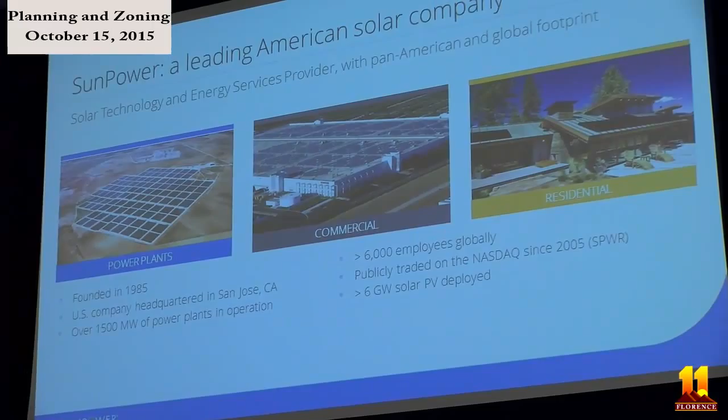I won't stick on this slide very long, but just want to talk about who SunPower is. Again, we're a U.S.-based company, headquartered in San Jose, California. We have over 6,000 employees. We've been around for 30 years.

This gives you an idea of where our project is. The Bonnybrooke Solar Project is right here in black within the circle. I only have 2 arrows here just to show this is SunPower's project. Often confused with the Bonnybrook project is the Sandstone Solar Project, which is sPower. So we just made our names very similar to confuse you, but they're 2 different companies. You can see the Bonnybrook project, our project, is out northeast of town, about 4 miles near the state prison complex. You see the flood zone here. There's actually, just adjacent to the site, some prison farmland that's farmed by inmates, as opposed to the Sandstone project, which is surrounded by a master plan community.

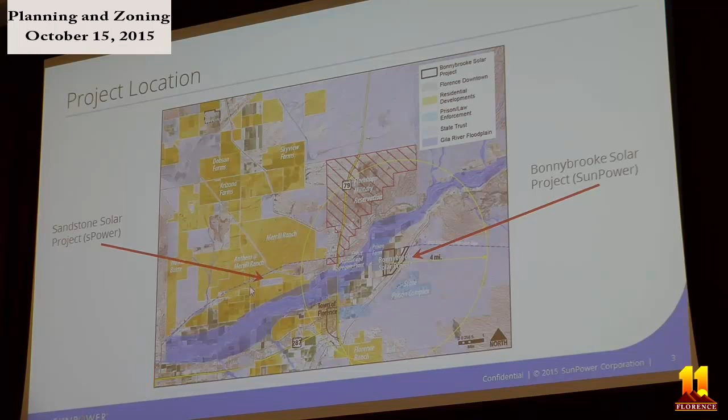One quick slide here on SunPower technology. I won't go through everything here. Just at the last Planning and Zoning Commission hearing, I think one of the commissioners had a question about the height of the system, so I dug into that a little deeper. The horizontal supports, the torque tubes for our single axis tracker system, are about 5 feet tall. So if the panels are completely level, your system's going to be about 5 feet. At full tilt, when they're at their 45-degree angle, the max height's going to be about 8 feet, never higher than 9.5 feet.

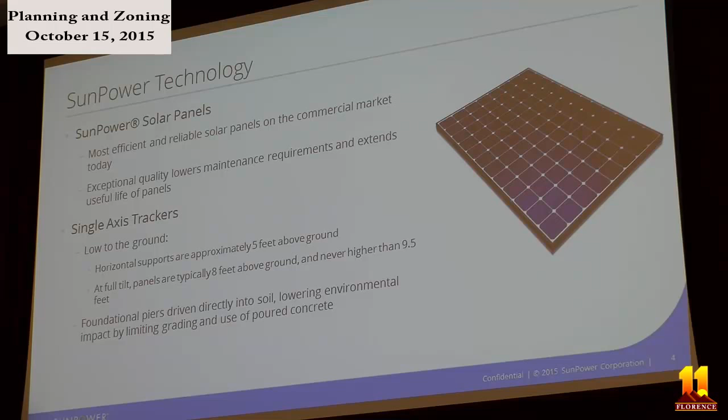And that's really it for me. I just threw up a slide here that's in the design review application of the site plan that we could use for reference, but I'll pass it over to planning.

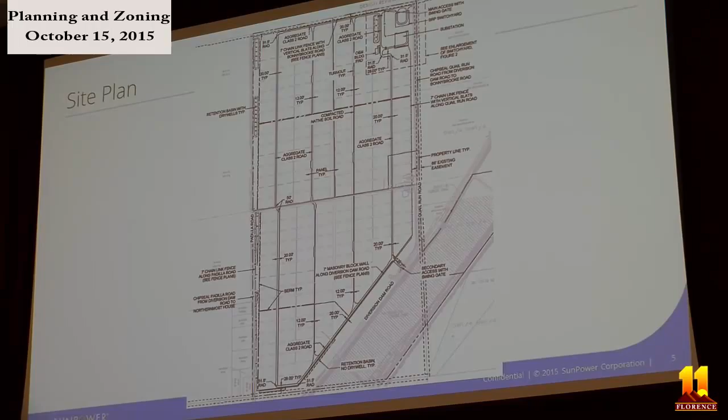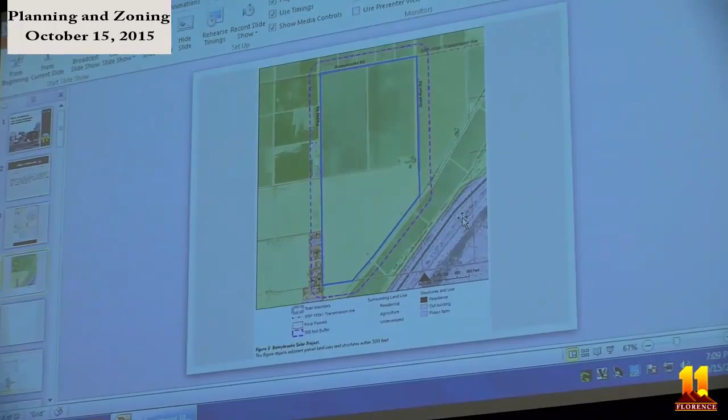Chair, Vice Chair, Commission. Since you've already given a great description of where it's located, and Drew just gave another couple of slides regarding the location, I won't bore you with that, it's all in the staff report. The image in front of you is a close-up of the site, currently agricultural, surrounded to the west by some homes off of Padilla Road. There's the site plan that was just shown. I wanted to cover some of the basic points.

This project will be on 282 acres of agricultural land. As you know, the main road to get to the site is Diversion Dam, which leads up to Quail Run Road. The primary access is going to be off of Quail Run Road.

Let's see if I have a better image. Let's try this, this might work better. There we go. So primary access is going to be off of Quail Run, and to the north is Bonnybrooke Road. This is how you access the site, I believe it's 20 feet wide. It'll have a gate for security. The secondary point of access is going to be off of Diversion Dam, right here, and it'll also have a gate, a Knox box, which will allow emergency services to access the site.

What we have here in front of you is the layout of the very top, the entry point, the switch yard, the SRP switch yard. Over here we have an image that shows the layout to the operations building. The black portion, as you see here, that's the pavement, and the rest is going to be compacted soil.

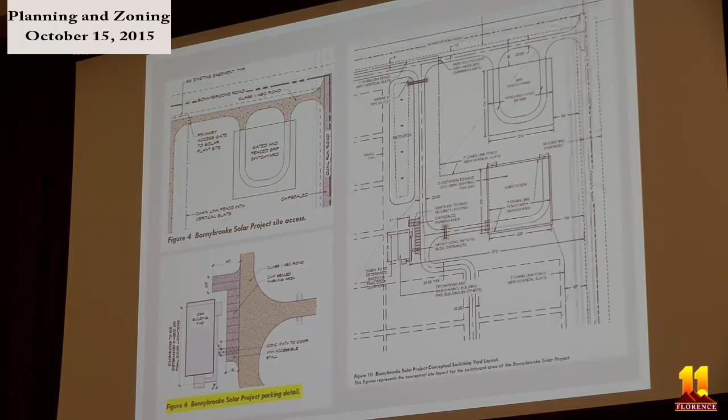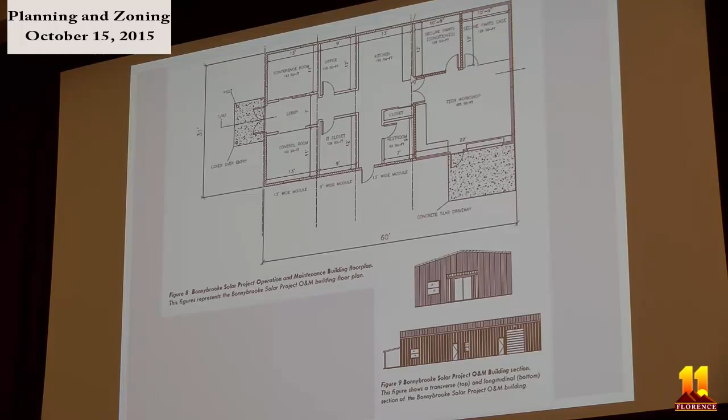This image here shows you at the bottom the elevations of the actual building itself, and the top shows you the layout of the inside of the property. Now, I wanted to cover a few more things.

Some of the improvements that SunPower has agreed to do for this site is they're going to put what's called chip seal on Padilla Road. It's a private access, but for the sake of the neighbors, they're going to pave with chip seal at this access point. They're not going to do any more improvements to Diversion Dam, but they are going to chip seal Quail Run Road.

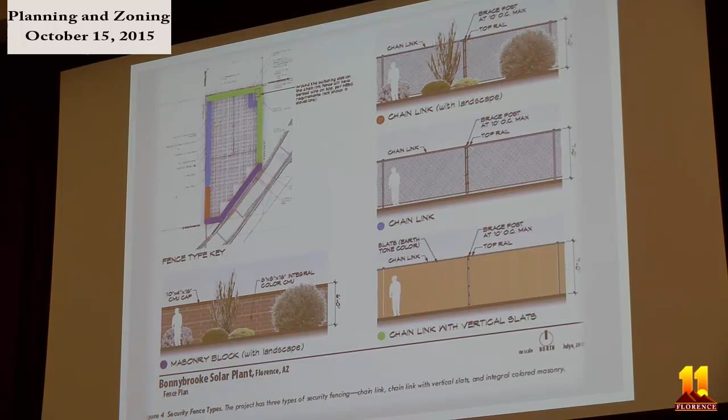So you're going to have landscaping around the majority of the southern portion of this project. They picked landscaping that should do well, mostly ocotillos, creosotes, those types of plants already existing in the desert, and they shouldn't take much for them to adapt and live on their own. SunPower has agreed to maintain it for the duration of the project, to keep it free of weeds, trash, and similar items. They are going to use a water truck to keep it watered in the beginning.

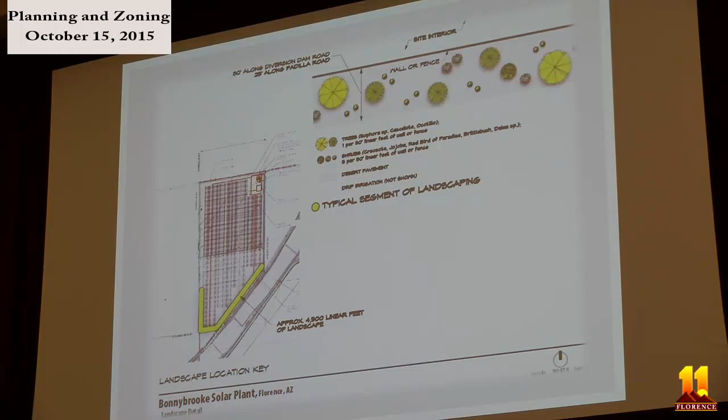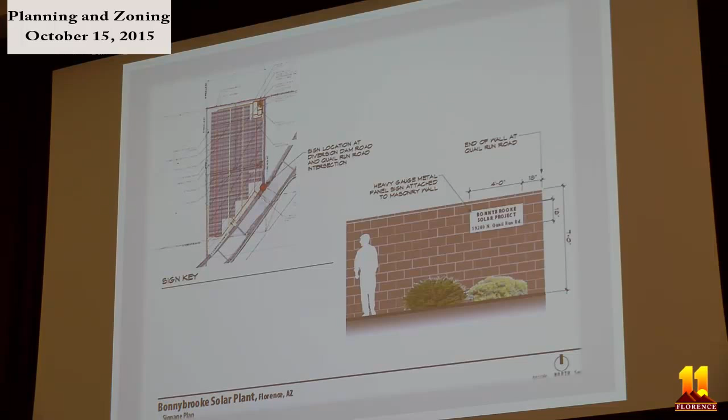They had also planned to do a small wall sign that's going to be on the entrance of the project. Within this project, we worked with them to have plenty of access points where people could turn around, and large vehicles could turn around, so they wouldn't get stuck within the project. We feel that after working with them and their team, we were able to compromise and come up with a well put together project.

I would cover the solar arrays, but Mr. Gibbons had already done that. The lighting, I believe they said there's some lighting that's going to be around the operations building, but not really much around the rest of the project. Mostly not going to be needed. Now you're not going to really have people walking around where the solar arrays are going to be at.

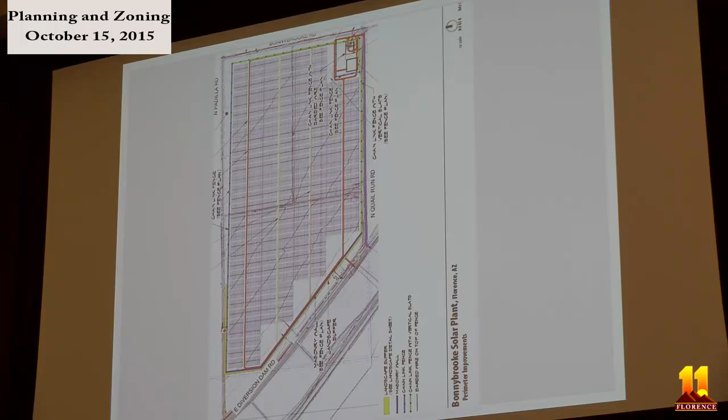So I did ask them, but it's really not going to be needed. Staff has recommended approval of this project. If you have any questions for me or for Mr. Gibbons or any of his team, be happy to answer them. There are 7 conditions that they have looked at and have agreed to. Once again, this is a similar project as what you're seeing that's being done just to the west of town. So, any questions for staff?

I do, Gilbert. It's just an observation. I'm curious. On Padilla Road, we have a residence, and that, if I'm not mistaken, is open chain link in front of their home. And then on Diversion Dam Road and Quail Run, or at least on Diversion Dam Road, we've put masonry. Yes, sir. Seems kind of backwards.

I can understand Quail Run Road because it's the main access road. But what about the residents? Chair, Vice Chair, Commission, staff had looked at that, but I believe our reasoning was that Padilla Road is a private access, not public. So public should not be on that road to begin with. That's why the focus was to stay on Diversion Dam for the brick fencing.

Well, I agree with that. I'm just thinking of the homeowner. He gets to look out his front window now, and they did try. It's kind of fun to watch the solar panels go back and forth, but after a while, I think it'll get old.

This is the pre-plat we are asking an extension for. Generally, you can see the lot arrangement here. Pretty much it is 605 lots, single-family residential lots. Primary access is from Walker Granite Road, which comes from south of the Hunt Highway. Average lot sizes are roughly 6,300 square feet. Proposed density is 3.92 dwelling units per acre, and the subdivision expands on the current plan, expanding the green belts and open spaces within the plat itself, and adding walking trails, which were also approved with the original pre-plat.

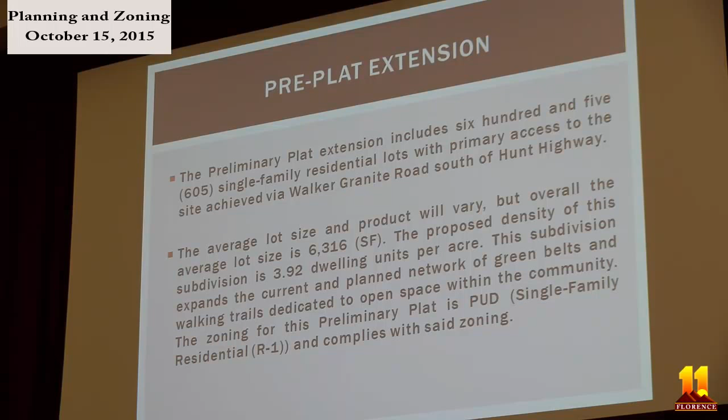And of course, the zoning is a PUD, and it has many single-family R1 type of residential zonings.

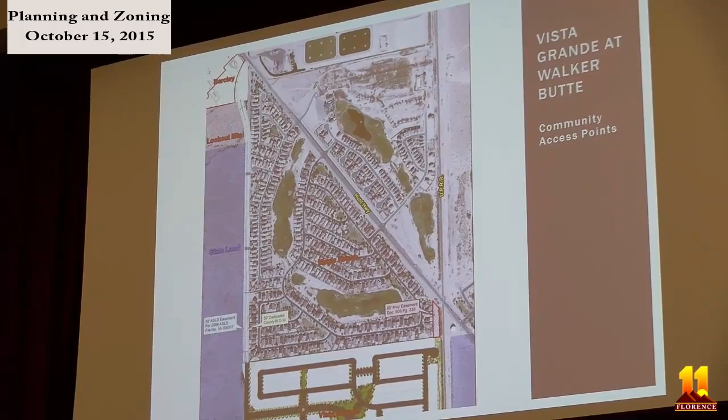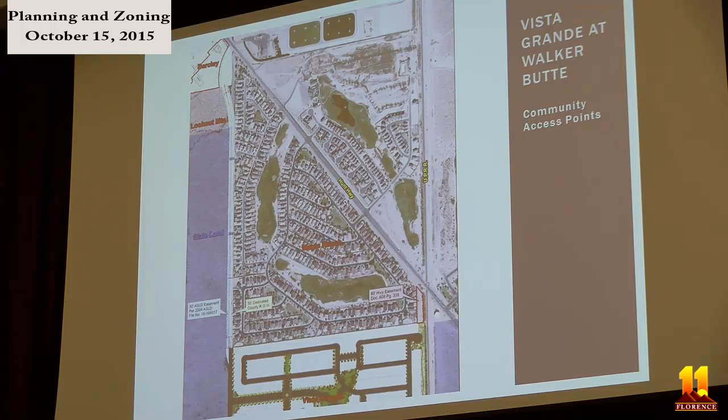Here's an aerial of the northern subdivision north of the Vista Grande at Walker Butte. I brought in this aerial to show the easement on the northeast corner of the subdivision, and to show the potential emergency access if it did occur. It comes from the railroad and Hunt Highway alignment to give access into the Vista Grande subdivision. The primary access is Granite Road right here.

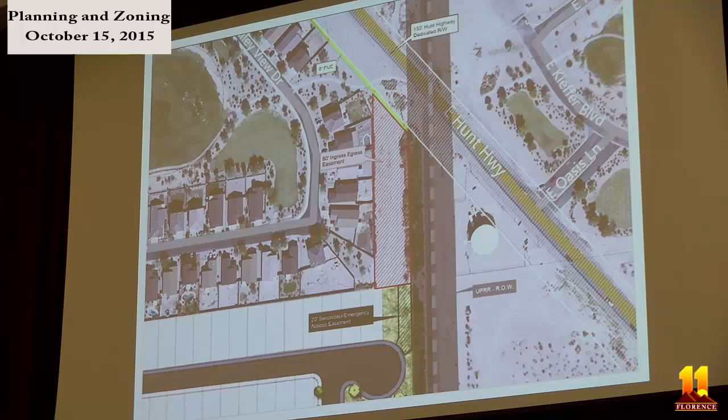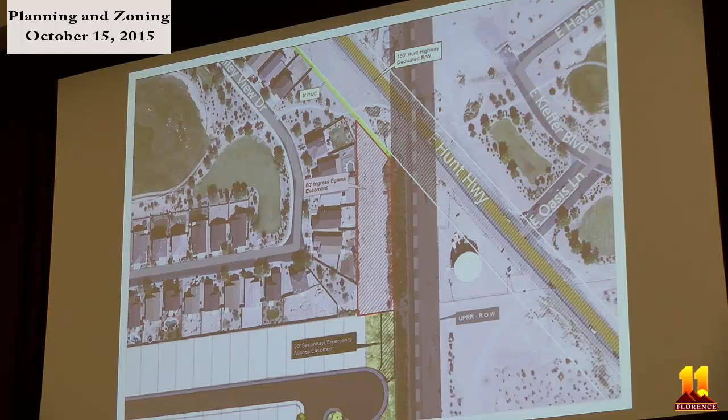Here's a close-up of that same northeast corner emergency access. It would come from this alignment, and if fire trucks or other emergency vehicles had to give access, they could use this area to get into the subdivision. As we know, it was in conformance with our zoning codes, and it received a PUD. The primary access is coming from Walker Butte, with the emergency access at the northeast corner of the site.

And that concludes the presentation. As it is an extension, the current plat, the pre-plat, was about to expire tomorrow on the 16th, and that's why they're asking for another 6 months.

Okay. Do we have any questions, comments?

Yeah, I just thought I'd comment on a couple things. Jim and I remember we did this because there was only single access to the property. So these guys came up with, the county gave up some land alongside that Oasis development to allow an emergency access.

And then I was going to mention, talking about plat extensions today at the county, we were informed by council— Excuse me, Commissioner, if we could stick to the case. It's related. I'll wait till— Sorry, I apologize. No, wait a minute, if it's related, then we're not going to stop in our tracks. If it's related to the case, go ahead, Vice Chair. Only from the standpoint it talks about plat extension. I believe. I'll wait till the open.

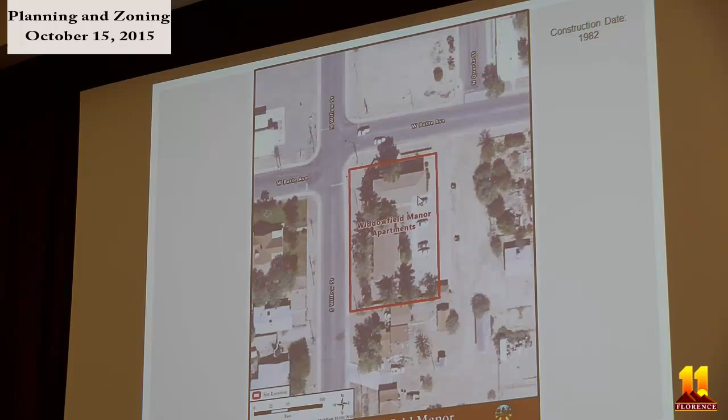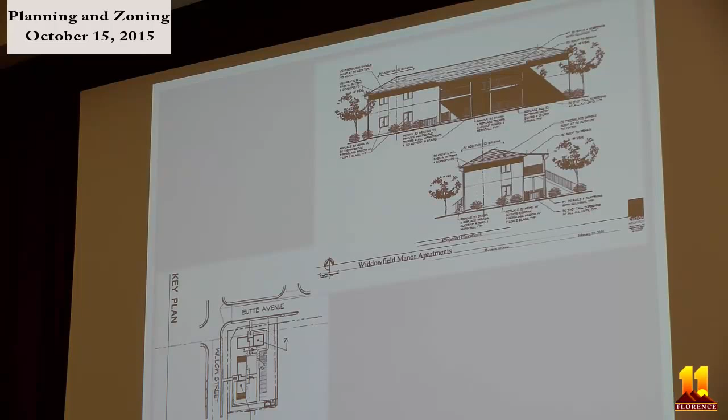Here's an image of what it looks like today. Here's a rendering showing Butte and Willow. And here are the other 2 properties we're talking about, Florence Park Apartments and the Big Horn Ranch Apartments.

As I said, he came to council, worked with staff, and on February 17th, 2015, council approved Resolution 1497-15, approving the support of the fee waiver, which would apply to plan review, building permits, and also impact fees and other related fees, but not to exceed $80,000.

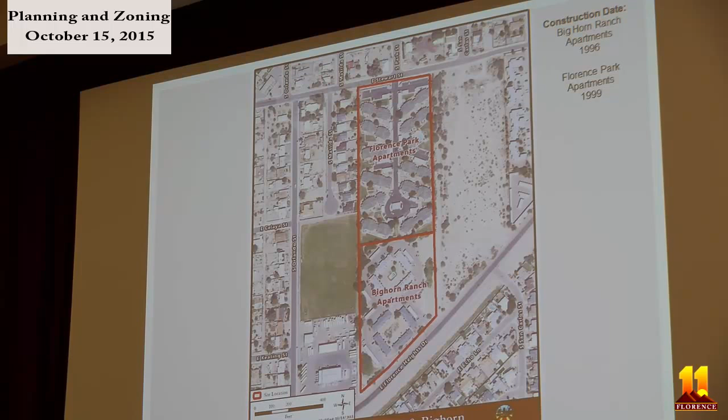Now, with that said, staff—I wanted to mention that this incentive plan we have, the Town Core Infill Incentive Plan, was created and adopted several years ago, I believe 2011, and we've had a few opportunities to actually use it. This is another example of where it's going to be a big benefit to the town. What this allows, along with the waivers, is that it also works with non-conforming properties, which is the case with these three different properties.

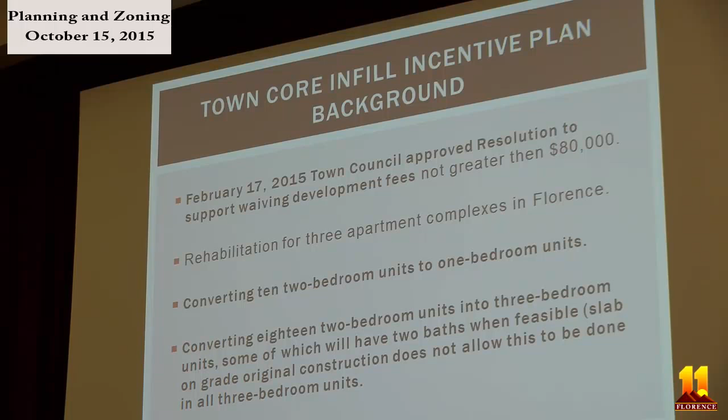So when the grant is used along with the waivers, we're going to be able to basically rehab 3 separate apartment complexes here in Florence. And ultimately, what's going to result from this is converting 10 2-bedroom units into 1-bedroom units, converting 18 2-bedroom units into 3-bedroom units, some which have 2 baths.

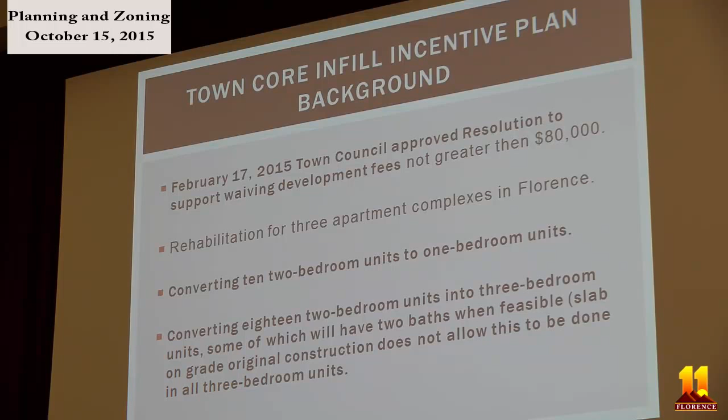Staff has given you basically the same details in your report, but this is a great opportunity for the town, where we get to rehab some of our existing apartment complexes here in town. If you have any questions, I'd be happy to answer them.

Mark is here as well. We have the town attorney with us. After tonight's meeting, this will also go to town council for action on November 16th. Do you have any questions for staff?

Just one. Right now, here you're talking about a recommendation. In the agenda, we're talking about approval, disapproval. Which are we doing? I apologize, it should be a recommendation. That was staff's fault. This should open up to public. No, there's no public hearing on this case. Okay.

I had one question. If you're converting some of these to 3 bedrooms, it says most or some will have 2 bathrooms. I would think that with a 3-bedroom apartment, they should all be 2 bathrooms, or at least a bath and a half. Chair, Vice Chair, Commission, I wasn't privy to what the grant allowed or required, so I would believe that he's following what the grant will allow him to do. Staff has been able to work with CDBG grants and some other CLG grants, and they're very specific as to what, but I don't know the actual details of what he can and can't do.